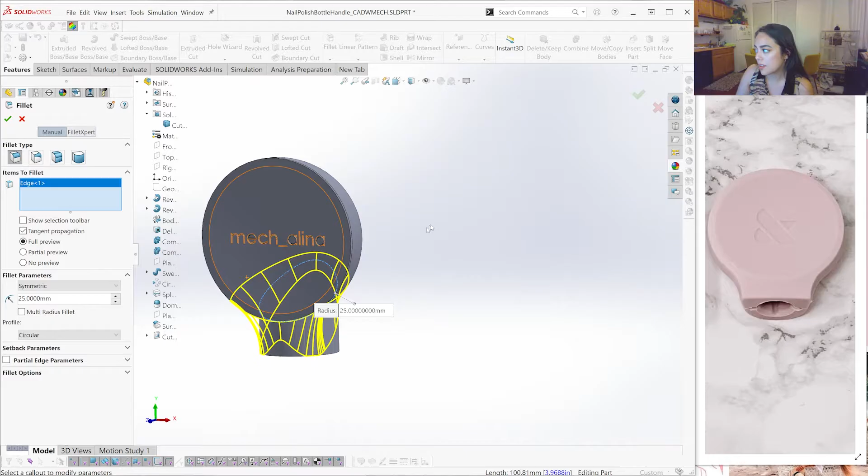I saw this nail polish bottle capper that you put on a bottle of nail polish that makes it easier to handle and more easy to paint. Online, the reference product looks like it's some sort of elastomer. I have a 3D printable TPU filament that I think will have that type of compliance needed to fit over different nail polish bottle caps, and I think it will work just fine.

So let's dive into SolidWorks.

The photo I have here is showing the nail polish cap we're making. It kind of looks like an igloo. So how I'm breaking this shape down: it's my first time designing it. There's this igloo dome shape, and then there's this revolve nail polish shape, and it all sort of lives and has this flat portion here, and they blend together. So I'm gonna do mostly solid modeling and some combines to create this shape. I'll keep this reference image up.

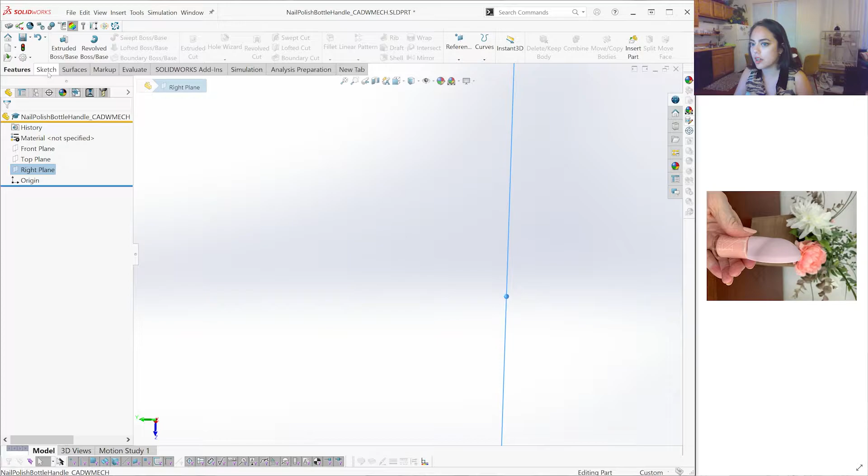Let's go. I already created the part file here, and let's just start creating a geometry sketch. I'm gonna actually sketch out everything here to not create a solid feature, and then go back and convert those entities into different features. So this is kind of like my base model that will contain everything.

Y'all know I like my infinite length center line. So I'll do that there, and I will sketch out the actual nail polish bottle, something like this on the inside. Actually, I'll do one with a slight taper to make sure we know it fits my personal collection of nail polish bottles.

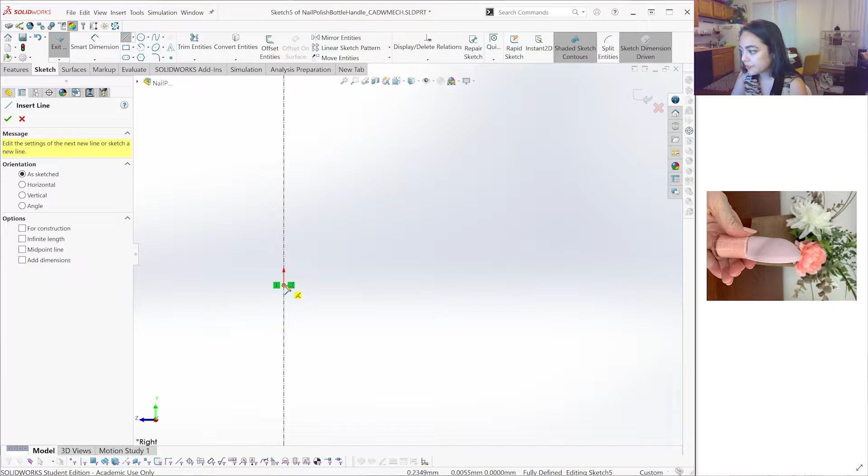All right, I didn't click the origin of that one. If you're following my keyboard shortcut settings, which I will upload soon, that was L to create lines. And let's taper on the inside. If you know you're eventually going tapered, make sure you're not getting auto constraints like verticals where you don't want them, and that you're starting your design with that taper in mind.

So the first section I see, and I'm gonna enclose this here, is right now I'm doing this portion of the igloo. So I'm only drawing half of it. I will be revolving things around this infinite length center line, so that's why it looks how it currently looks.

The nail polish bottle I will make green, and these lines here I will make another color. I always use sketch colors, and this is just a visual guide and reference for me. And I will make this hot pink. Cool, so that's this portion.

And now the next portion is the igloo portion. This igloo portion, if you can imagine, is like another dome revolve shape. So we have one revolve along this length here, and then we're gonna have another revolve around that length there. So first thing I'm gonna do is create that revolve in the other direction.

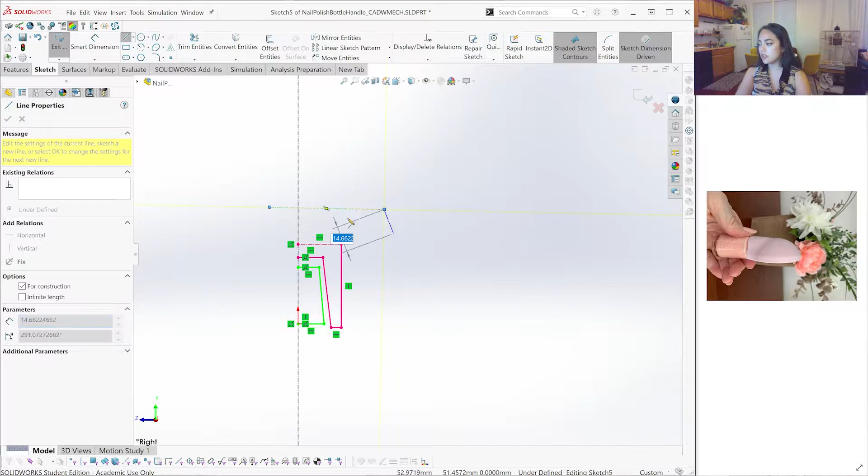This here I know will be horizontal, and I will just start by creating a circle and doing something like that, figuring out where the circle ends. This is kind of funky because the top of the circle actually kind of blends with this surface here. Maybe if I switch directions like this, that would help. Give me one moment. All right, I just switched directions to make this a little easier to visualize.

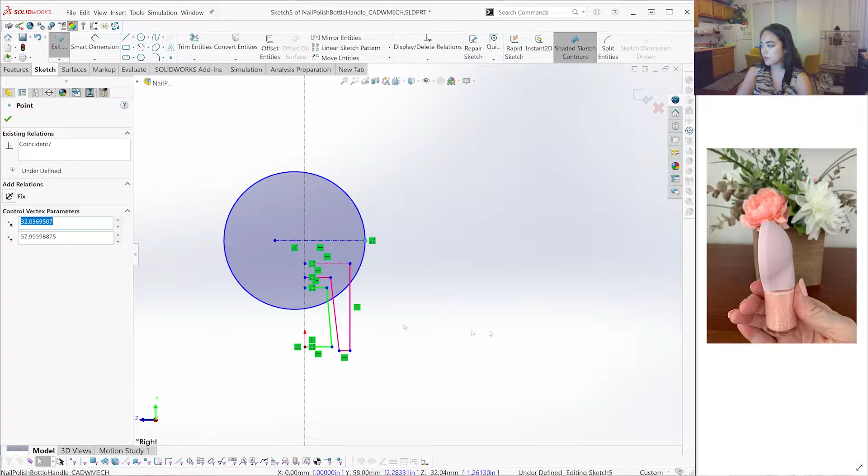Again, I'm not putting dimension numbers since this is kind of a freehand sketch, but it's gonna look something like this, and we want the flat of the dome to end where this revolve stops. What I mean is, since I'm only drawing one side, I actually want to know where it falls on the other side. So I'm going to simply mirror those entities, and it's totally fine, this is all kind of just reference geometry.

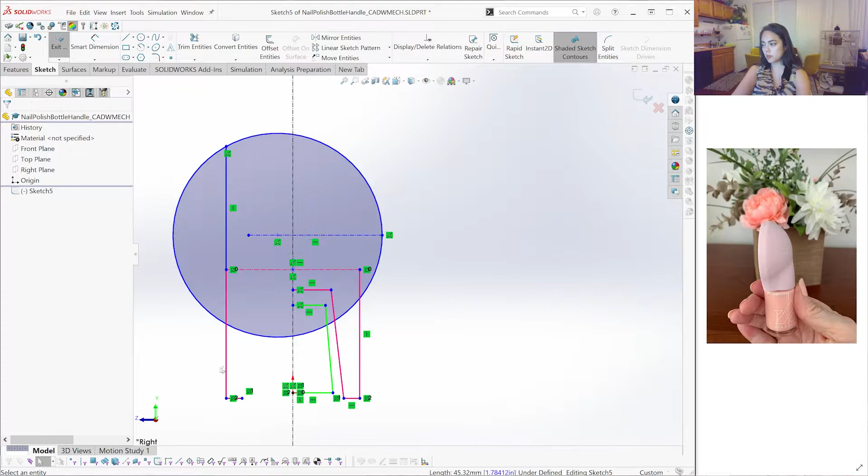Cool. So with this line, I know that is where I want to cut my circle. I'm going to do something like this. Actually I wanted this to be a regular line. If you highlight the line and click G with my keyboard shortcuts, that will turn it back to regular. Trim entities, love my trim to closest, and we start having it here. Let's just delete these other excess segments there.

So now we have kind of the start of the overall shape here. And then for the igloo shape, I am going to make that purple. Cool.

Tangent isn't really what I want here. What I want is for this to be tangent to a perpendicular line. So I'll create a little reference line up here and make that horizontal to this, or we can make it perpendicular to each other to make it a little more flexible.

So holding both of those perpendicular relations, let's take this line and this line and make that tangent. Awesome, so that gives me kind of that shape I'm looking for.

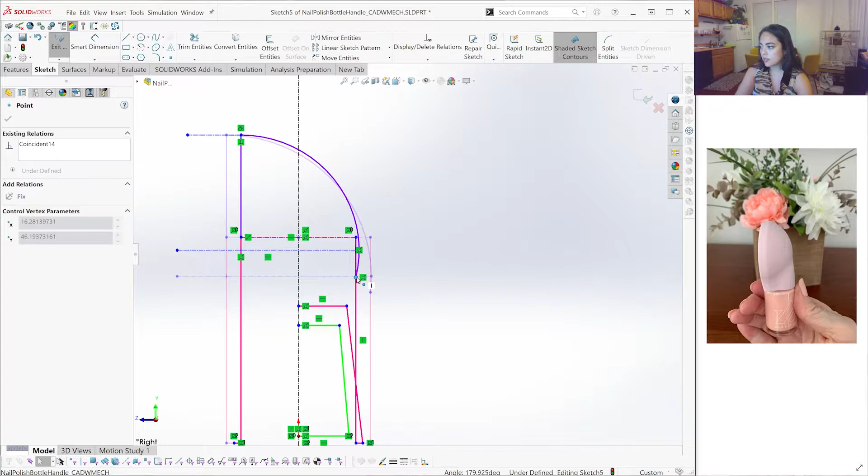As I deleted that vertical there, let's make this line collinear for now. And this we can begin to mess with later, but let's just make sure that it will generally build.

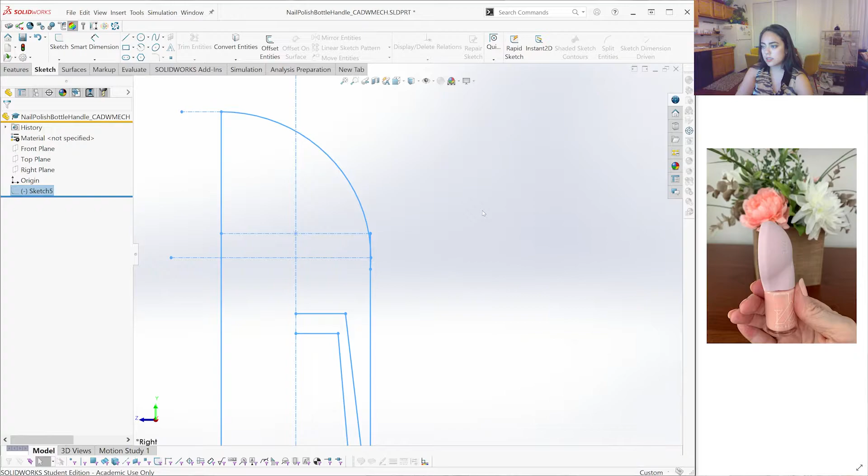Do something like that. And I don't actually necessarily think the midpoint of the circle is there. Great, let's get started and just start doing our solids and see what this begins to look like. Again, I'm not creating my features from this.

This is just our overall geometry sketch for visualization. On the same plane, we can start now building out the features. So the first thing I want to do is revolve that bottom feature.

So I'm going to go here, here, here, here, here, and I'm converting all these lines. Amazing, sometimes those long lines don't show up unless you zoom way out. I just converted that into a geometry sketch.

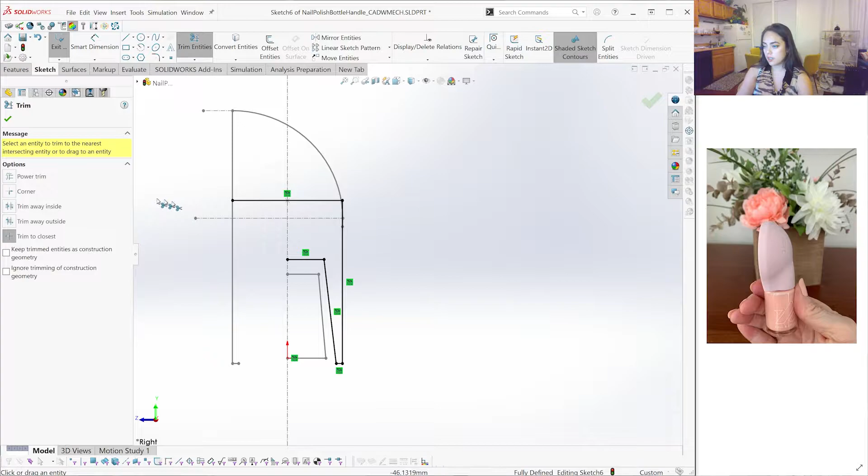And then let's trim some entities. Cool, and the last thing is just to connect these two pieces. And then, yeah, that's the sketch for the tube that the bottle tip inserts to.

Let's revolve. And yep, I picked the right line. Awesome, that's the bottom piece done. And then now let's do the revolve in the other direction for the dome of the igloo.

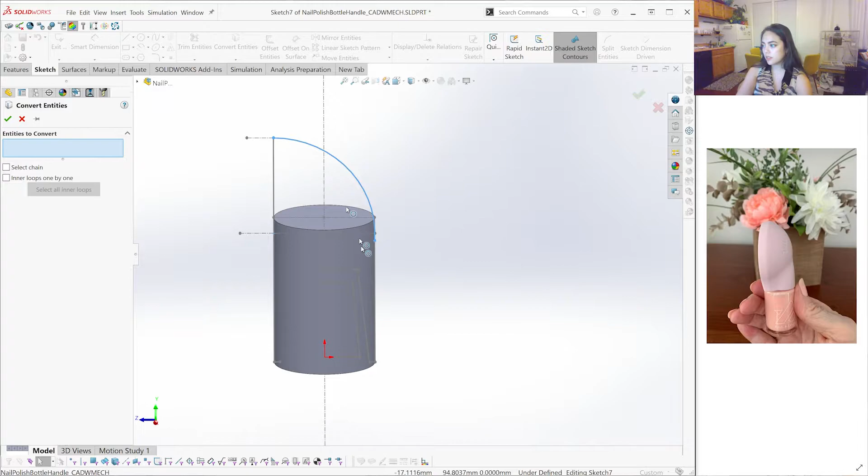So just start another sketch, right plane, and then let's convert the entities we care about. Convert. So center line, this line, gotta make sure it all connects.

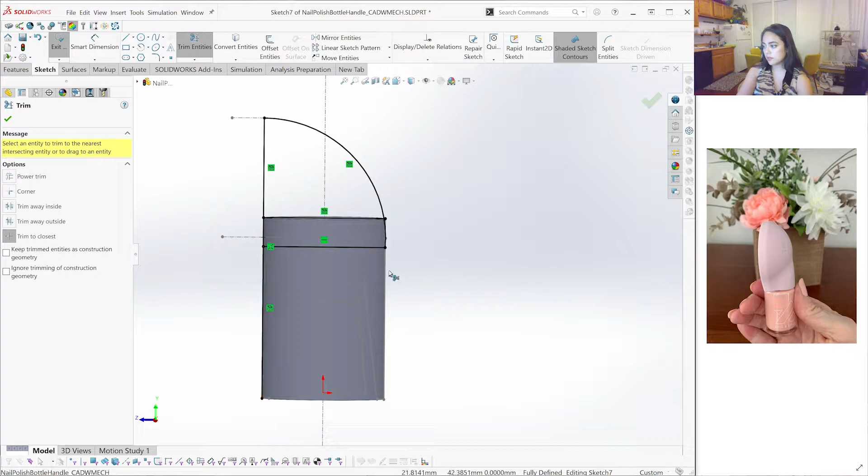And then now I'm just connecting the dots here because I didn't originally draw that line there. Let's trim the excess down here. It's fully enclosed.

And now we can select this axis of revolution, and we want it to go all the way. So when SolidWorks auto selects thin features, that actually means this isn't a properly enclosed sketch. I could have selected it to work around it, but I can see actually this is the line I did not want, I think that was for the other feature. So I'm just gonna delete that.

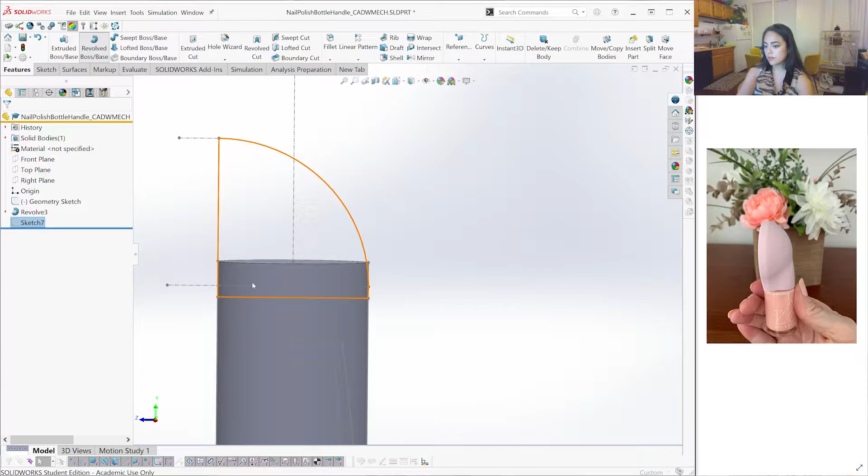And then let's check shaded sketch contours. That still looks good. And let's revolve. Something like that, and we don't need to merge just yet.

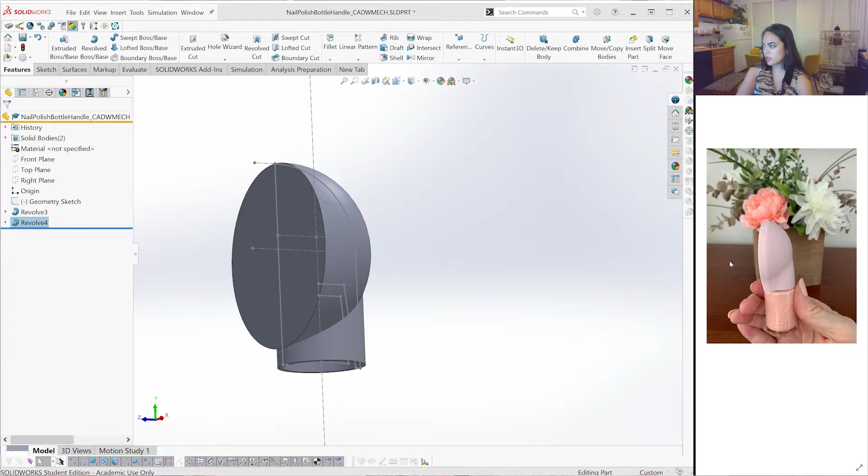Awesome, so we now have our baseline shape. This kind of looks like that one character from WALL-E or something, you know what I'm saying?

Alright, so I think this actually is starting to look pretty good, kind of the things I want. I'm not going to exactly mimic this kind of flat bevel chamfer edge along the corners or all of that, just kind of want the overall basic shape.

But let's go in and start throwing some dimensions now that we're feeling good about this kind of freehand design. So going into the geometry sketch, clicking N to view normal to the plane. Let's start measuring some stuff.

So there will be some compliance, and I think my TPE filament will stretch a tiny bit, maybe up to 1/8 of an inch. So if it's too big, this won't work, and if it's too tight, well, we want it a little tight so it can fit around the different nail polish bottles.

But you can't go too big. So I'm gonna take my biggest nail polish cap and make sure that you still get a little bit of a fit here on this one, and so this one's just gonna be my baseline dimensions.

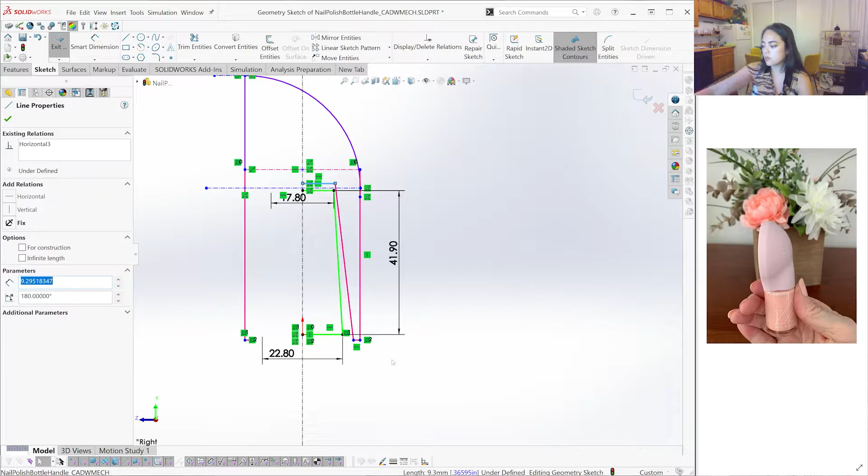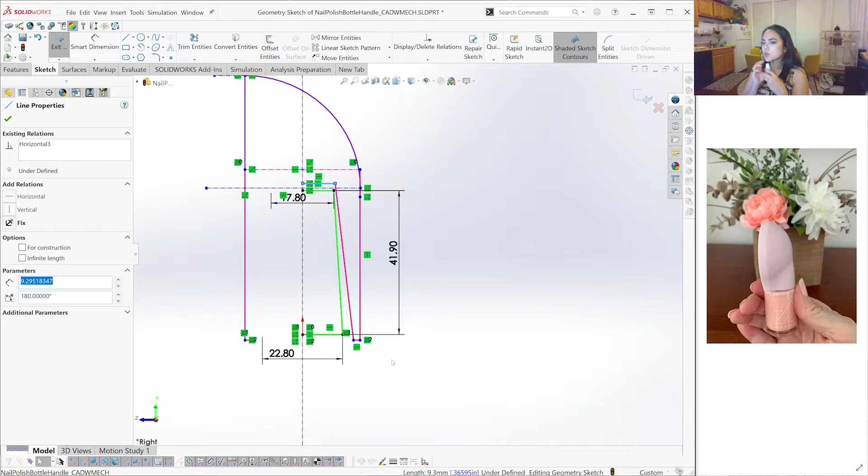Let's start editing the dimensions that go around it. One decision is where do we want to bottom out. Do we want this to bottom out on this part of the nail polish bottle, or do we want it to bottom out from the top part, ramming up into it? Thinking about it, it probably doesn't matter. The big thing is we don't want the cap to get in the way if we want to screw this back down, but we probably want to remove the cap anyway.

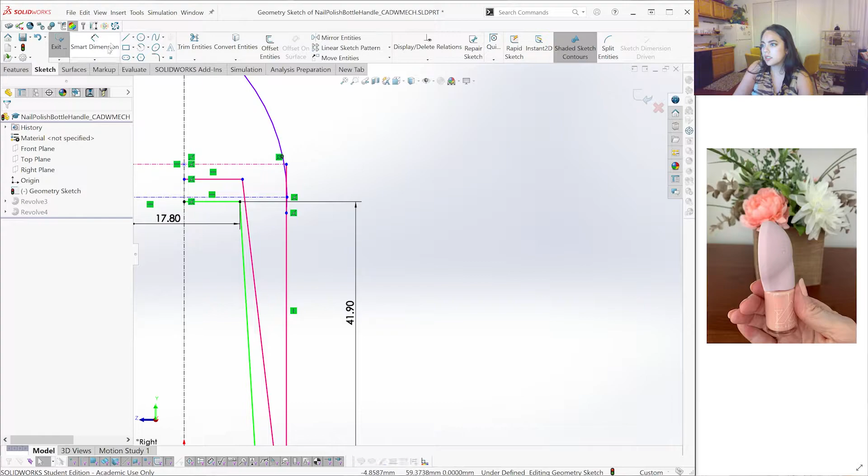So I'm going to, at least with this nail polish cap, have this and this flush or aligned, so I'll make that go linear. And let's give this a little bit of a gap in case there's a significantly longer nail polish bottle, so I'll add 5 millimeters there.

Nice. And then as far as this wanting or needing to fit, the other thing we need to consider is I also want to make sure I'm getting a tight squeeze on this bottle. So right now with the draft angle, this needs to go pretty far up to be able to match the diameter of this one.

And I think we can compensate for that by adding another feature in later. I want to add a crush rib feature, and I'll show you what that is if you're not familiar. I think we can do a pretty much 1-to-1 fit on this little guy here.

So what I'll actually do is make this line parallel to this line. I'm doing this because I know my material is compliant and stretchy, and my 3D printing is a little off, so I'm just going to make this like a 0.05 of a millimeter gap here, just a hair's or so bigger.

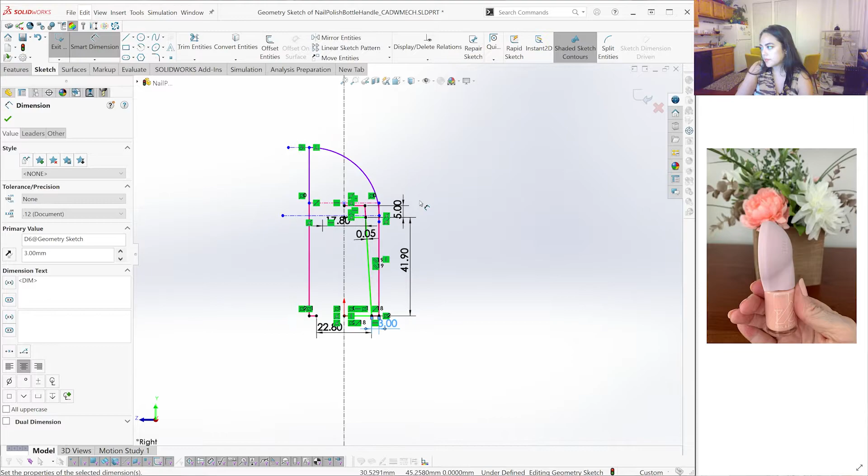And that's looking good. I'm just going to exit my sketch here to be able to save and see the updates.

Let's go back in. Beer break. I just winked at the camera. I didn't like that, I'm not going to do that again.

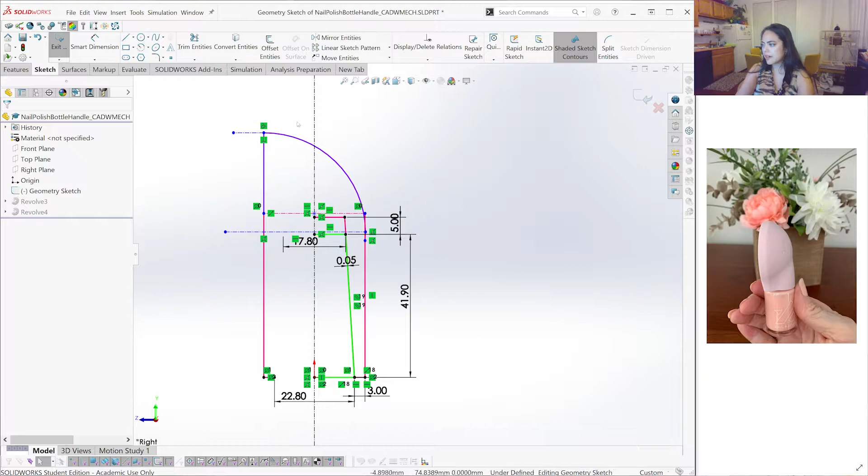Alright, let's play with this bad boy. I don't have real life dimensions, so we're just going to do what looks stylish and hand holdable, what can fit nicely into the palm of my hand. Let's see if I can get back to that side view.

Alright, I have the side view showing again. Some points I care about are maybe how much the crest of the dome sticks out from this portion here, and let's just say a tiny bit, I'm going to make that 2 millimeters, so bring that in a little closer. And then generally, remember, we want to dimension what we really care about, and what I really care about is actually the overall height of the thing, so I'm going to pick that point to that point.

And then just with my calipers and my hand, I'm going to see what would be comfortable for me to hold. Another thing I like to do is always have Play-Doh or some sort of sculpting dough around, which really helps figure out sizing and shapes when doing handheld things or surfacing, so what size and shape is actually going to help me get that nice grip control and paint my nails. So something about this big, at least for the spherical portion, and then a little more sticking out.

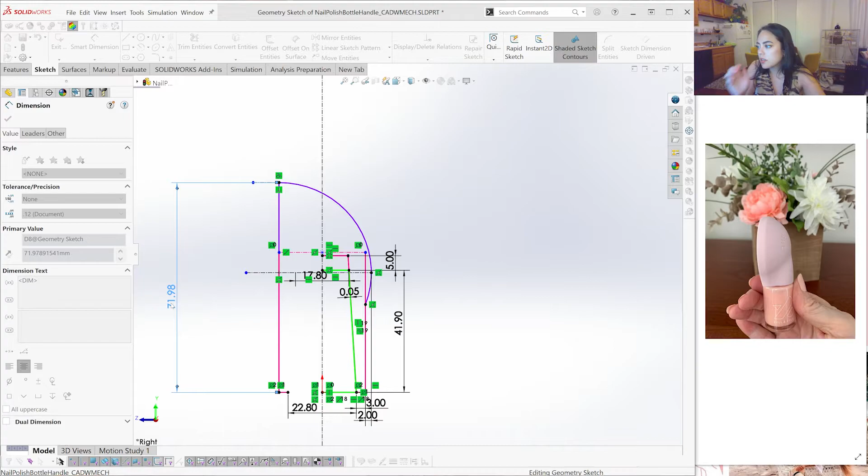So this has a spherical portion of about 60 millimeters in diameter. We want it to stick out a little bit for the bottom portion. If you imagine this sphere were to continue down and around, like it would go down to this point, we have it sticking out a little. Maybe 15 millimeters. So let's make the total of this 75.

I'm going to turn off sketch colors to see what we have not constrained. Actually, it looks like everything is pretty constrained except this reference geometry line, which doesn't really matter. I'm just going to tuck it away with this one here. And yeah, we have a fully defined sketch, which doesn't matter really for the geometry sketch, but make sure it stays stable and doesn't update funky.

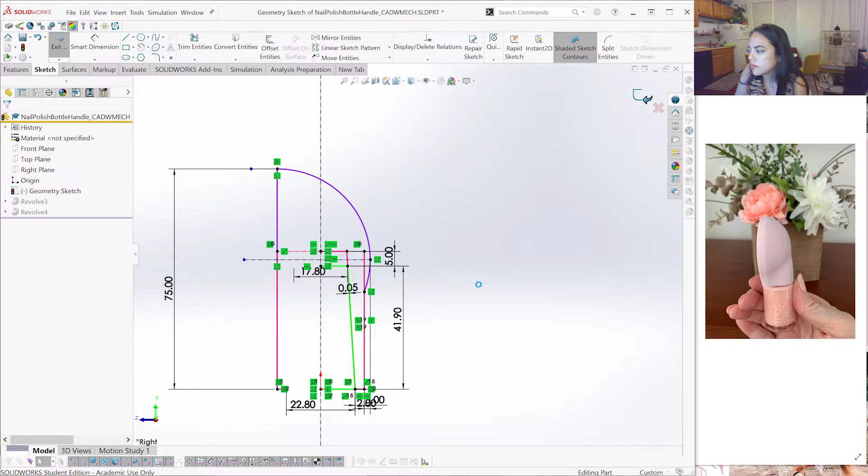And let's solve some problems. So we got some rebuild problems, which is no problem at all. Aha, so actually what I did before with that reference was breaking it.

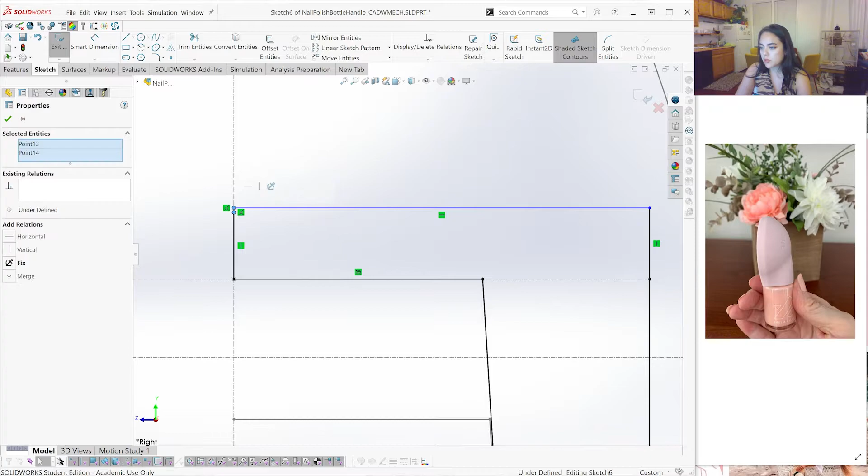So what I'm going to do, just to keep this an enclosed profile, clicking L to start my line, I will just add some arbitrary thickness there. I totally forgot that that reference line was to enclose the first profile, because I was picturing this to do this in 2 features. This distance doesn't really matter. I'm just going to say 1 because it's all in here and we're eventually going to merge it together.

Alright, and this is off too. So this is actually our center line. I just converted that over, trimming the excess.

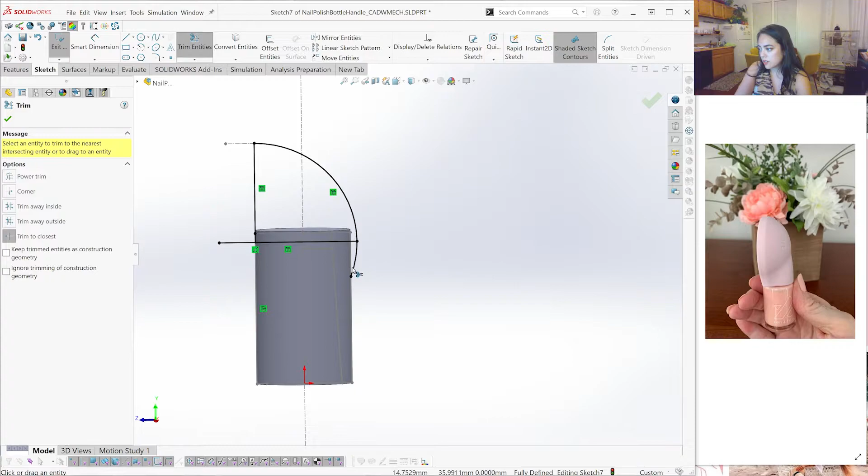And when we exit, let's see if that picks the right revolve. It errors out, no problem. The axis is not valid. It's valid now.

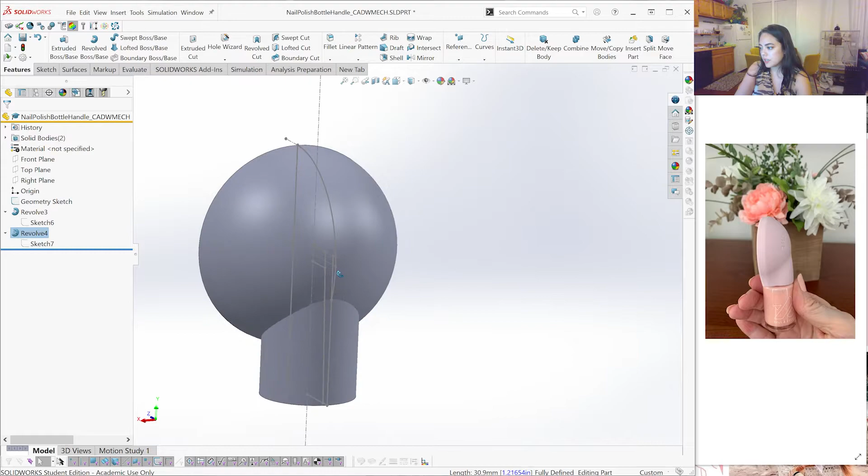Great, and now we have our basic shape, and we'll do my favorite thing, which is throwing lots and lots of fillets to smooth out some surfaces. So let's actually...

Start by combining these features, and then let's add the detail features to help with the compliance of this bottom portion to be able to stretch with slightly bigger bottles and then work with slightly smaller bottles as well. Alright, so what we want to do is make sure we don't have this overlap section in.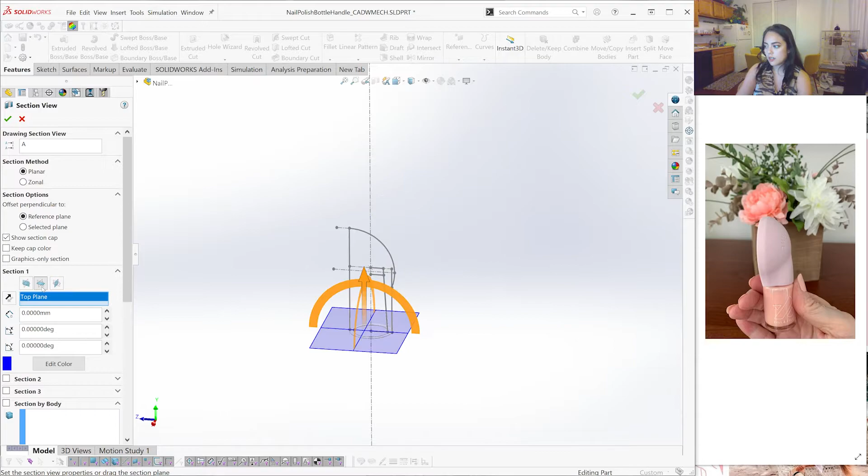If I were to do a section view, so that's clicking here and switching over to the right plane, you can see we have a major issue of this material being stuck in there. There's a lot of ways to do this.

I'm going to do some subtract body features. So the first thing I'm going to do is create a subtract body that I want to subtract from, but I want to keep this original Revolve 3 because I like that. So the first thing I'm going to do is just copy the body of Revolve 3.

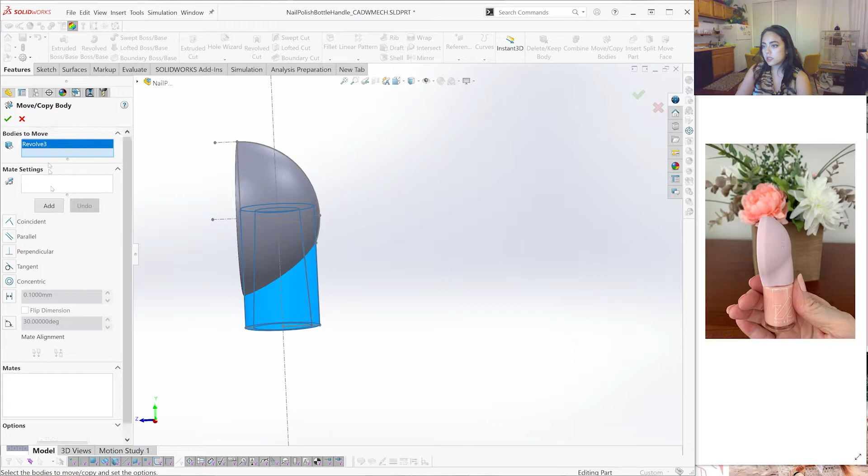So this is move/copy, body to move is Revolve, and I don't want to move it, I don't want to do anything, so I just want to say copy. If I move to this menu, I like copy, click OK. I now have a copy of this.

So I'm going to hide these 2 original features, and then let's turn this feature here into a solid feature. I could fill this feature, I could do a lot of that stuff.

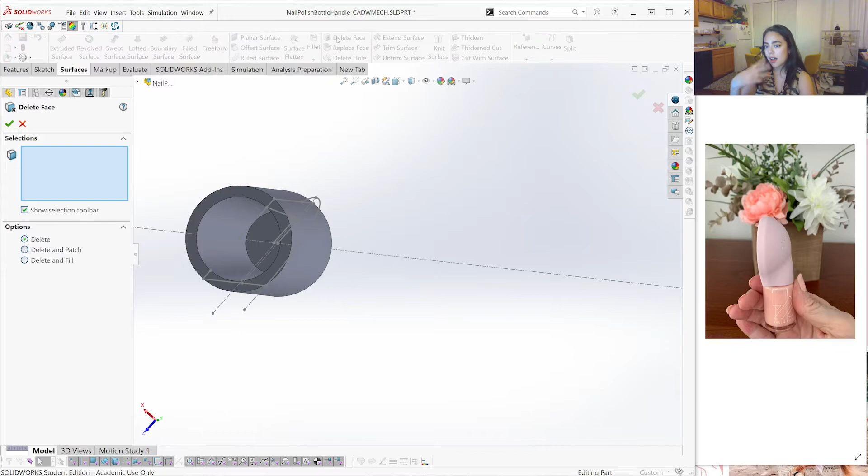This is not always work approved, but I will do a feature called delete face, which is a surface feature. We'll delete face and then have SolidWorks auto repair it with a patch. So if I were to delete this face and this face and show the preview, you'll see where it patches.

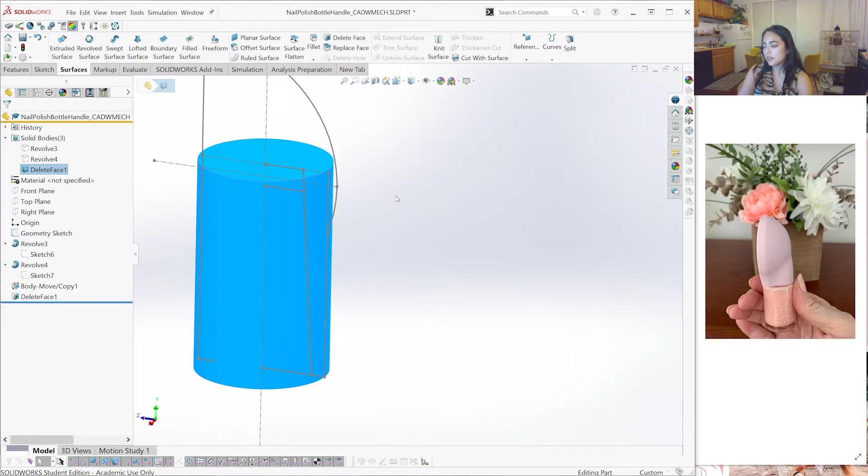And now we just created a full solid body of that. Delete face can kind of make your models a little sketchy sometimes, so it's not always advised to do that, but it's quick for this at-home tutorial.

I'm going to go now to the combine, subtract body. So you have, this is the main body. I want to subtract this one I just made.

And right now it looks like we have an error of 0 thickness geometry, which is probably the corner right here. So let's see what's going on.

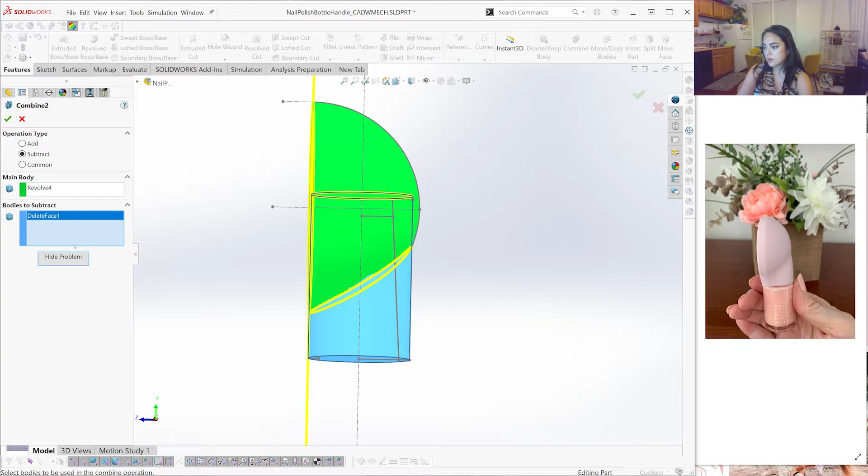So that's something we can actually fix within the geometry sketch. It actually doesn't like that it's completely aligned, because then it's aligning those surfaces at this intersection down here. Kind of strange.

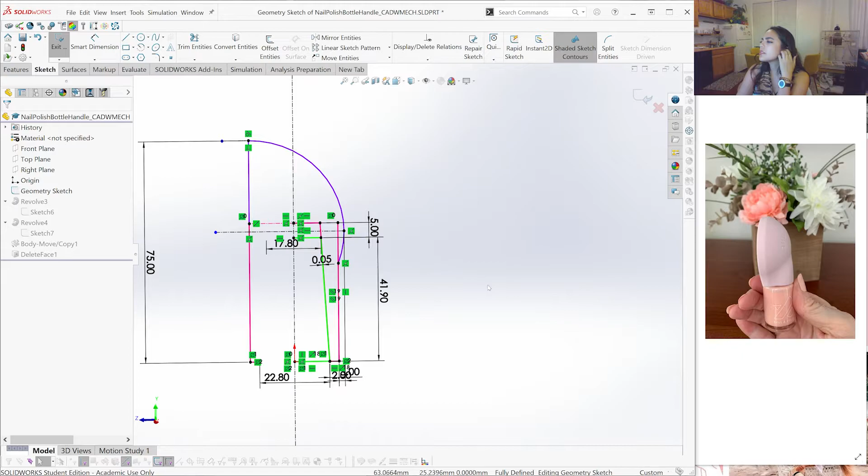So to be able to fix that so it isn't as weird, I'm actually going to go ahead and extend the sphere a tiny bit, so there's a little bit of overhang, like that.

If you're making a part exactly, this is maybe not a way I would recommend, but this for me right now is just a bit of a quick workaround, and I just want this to maybe overhang. Oops, I accidentally doubled that dimension.

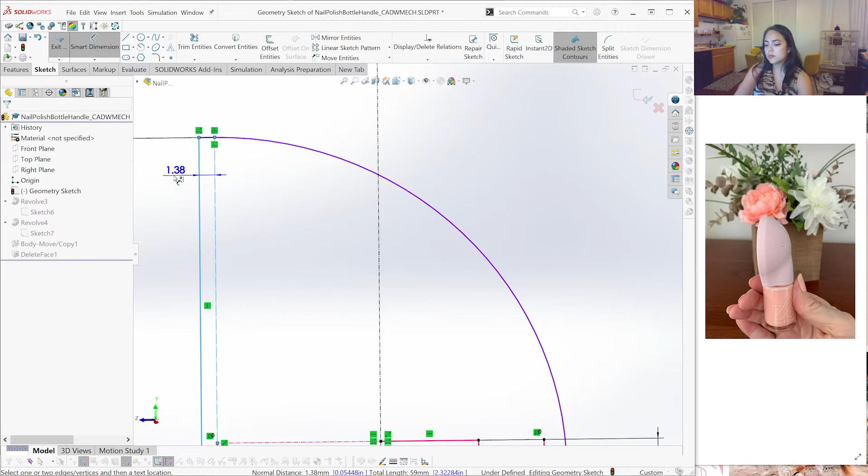Let's make it significant. Let's make that overhang by like 1 millimeter. I'm gonna have to go back and update the second revolve here. It's not gonna like that. I've got to reconvert some lines over. That's totally okay, so convert, convert, convert. This line here I'll leave, but let's make that construction. Let's make this construction.

Can you hear Faraday in the background? I got a new mic here, and I hope you can't hear him as much as in my previous videos.

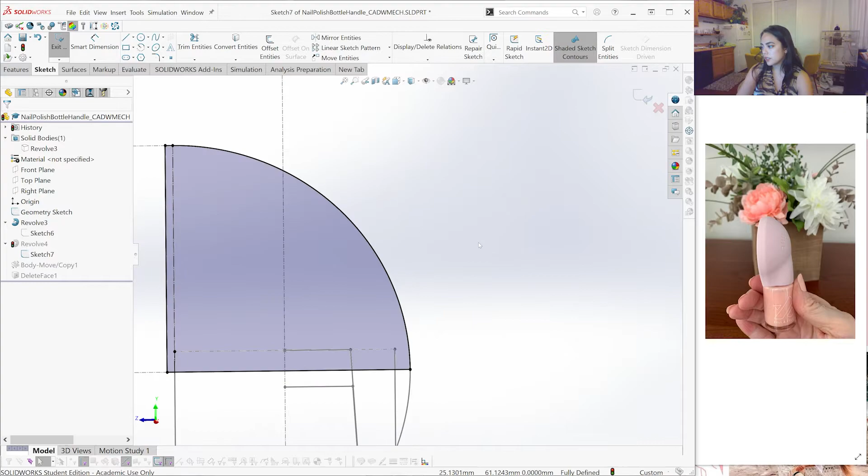So there is an issue. The sketch is not fully connected, and there we go. The lines were connected. Sometimes a little wiggle fixes that.

Alright, we have our WALL-E girlfriend, partner, BFF looking thing.

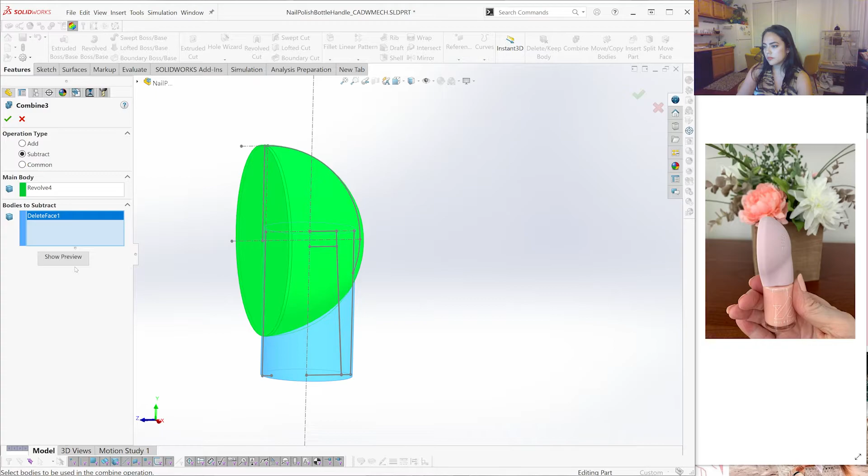And let's see if that fixes this problem. And voila, we now have the top igloo with a hollow thing.

Then I'm going to bring back the revolve here, and I have my original piece here. See, when we did that subtract body, it deleted that body and it got absorbed into that feature. That's why we had to create that duplicate. And now I want to just combine these, so this is one solid part. And voila, it is one solid part.

And we are getting there. I want to save this, and let me hide sketch lines for the crew here.

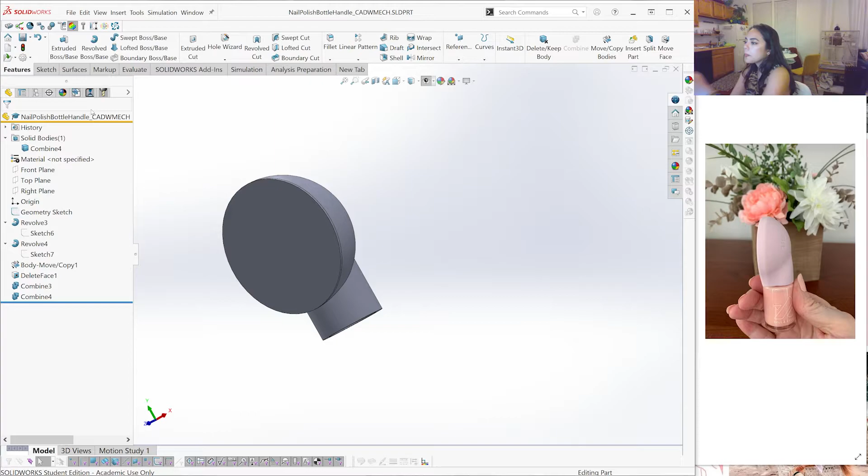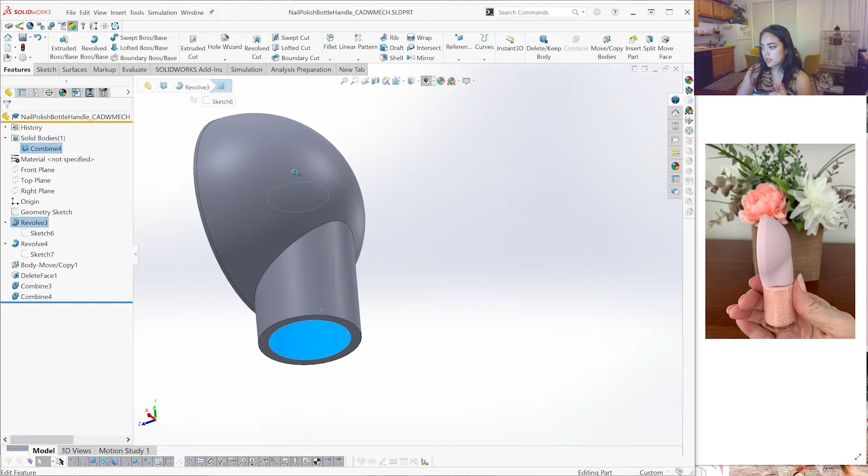Alright, let's do the crush rib features on this here. So how should we do the crush rib features? If we did a straight extrude, we can't, because the inside here is tapered. So many ways to go about this. I think what's going to work best is if we did a sweep along the path, and then created a circular pattern and could pick how many crush rib-like things we want in this.

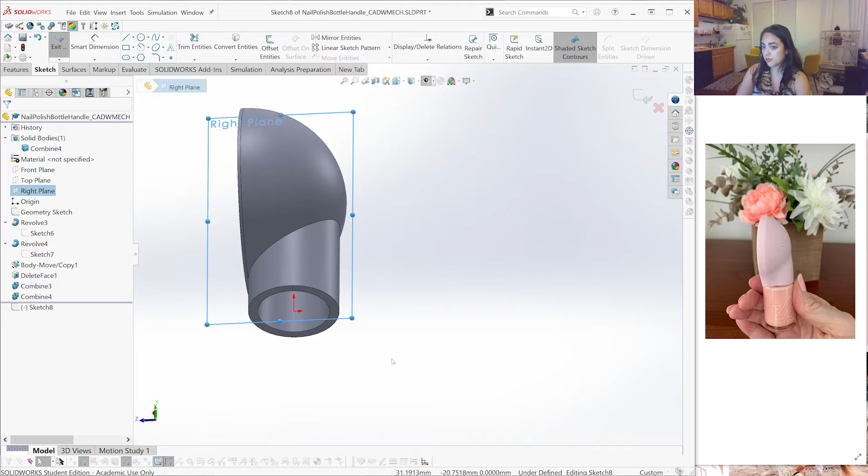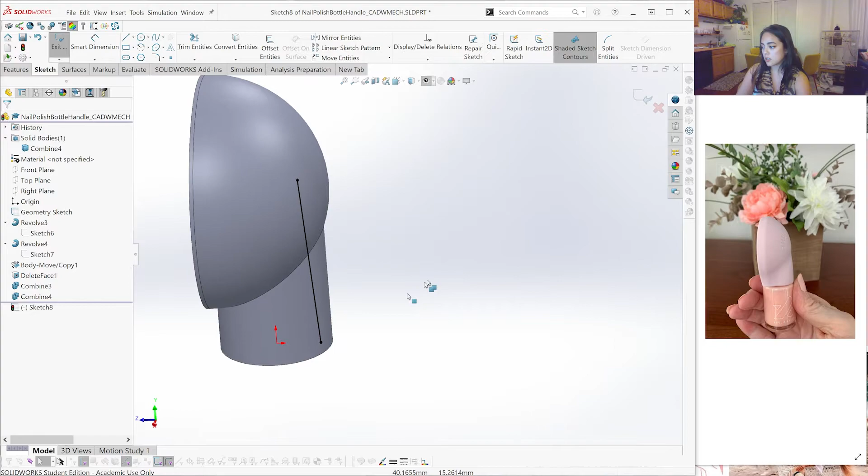So let's definitely start that. The first thing I want to do is create the sweep path, so I'm going to cut through again the right plane. It's my favorite plane, and I just want to follow the path of the inside. So if I just click that inside surface and then did that intersection, it will give me 2 lines. I only need 1 line, so I'm going to delete this one here, and really, boom, that is the path of my swept path. So remember, a sweep is a path you want to sweep along, and the profile.

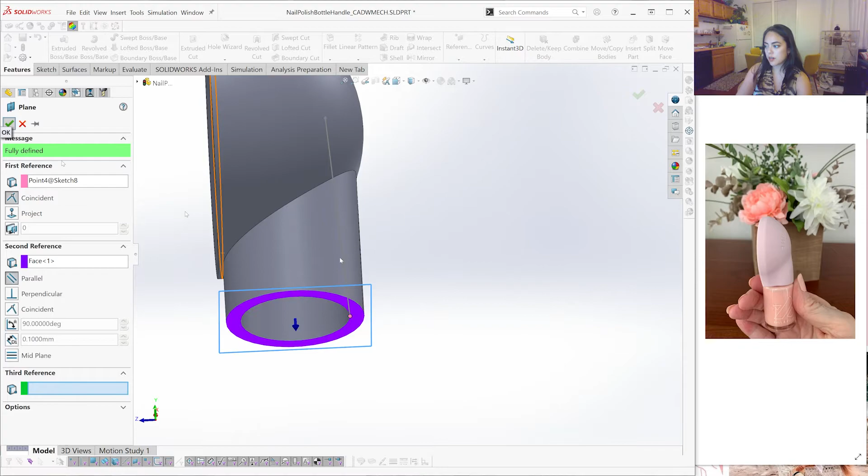So to create the profile line of this, I want to create a new plane, or I could sketch on this face. But to really make sure I'm clicking the right spots, I want to actually use this sketch to derive my plane. So I'm going to click this point parallel to this face to create that. It's the same thing as that face, but I just want to make sure that point is derived in case something gets wonky.

So from that sketch, or plane, we start to sketch, and we can pick what we want our crush rib to look like. I want the crush rib to be like a half circle, so if I drew a full circle here and have the midpoint resting and connected - you always want, when you're doing a sweep, to have a point of your sketch relating directly to the sketch path, and so that is my coincident there. And then for a little crush rib, we probably want the rib to stick in like 2 millimeters, so that's a radius of 2, or since we're dimensioning diameter here, that would be a diameter of about 4 millimeters.

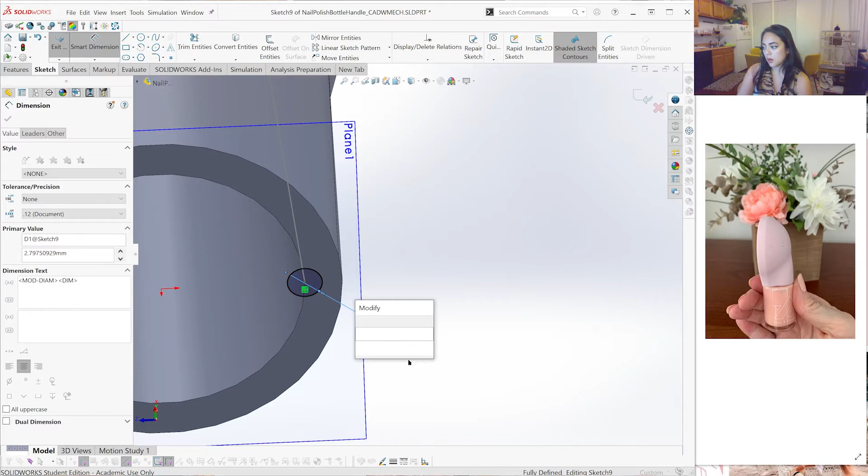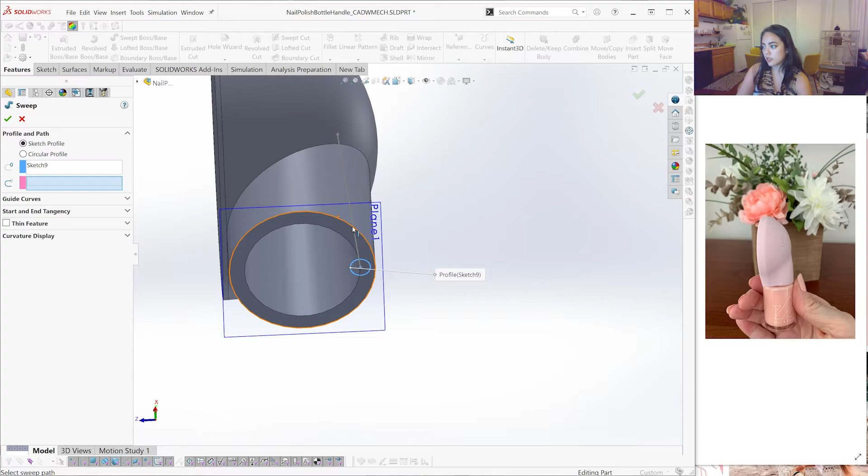Cool. I don't need to do anything else with this because I will be merging the solids, so I'm totally okay with that overhanging there. I'm gonna go to features, we'll go to our swept feature. There is our sketch profile, here is our path, and then I don't need to mess with any of the other features, and boom, there is my crush rib. You know, I will be printing this out of TPE, that's kind of semi-hollow, it has an infill pattern, so I don't want to make this necessarily hollow itself. So I'm totally fine with that feature.

Now with this feature, let's circular pattern it. And how many do we want? 4, 6, 5 if you're edgy.

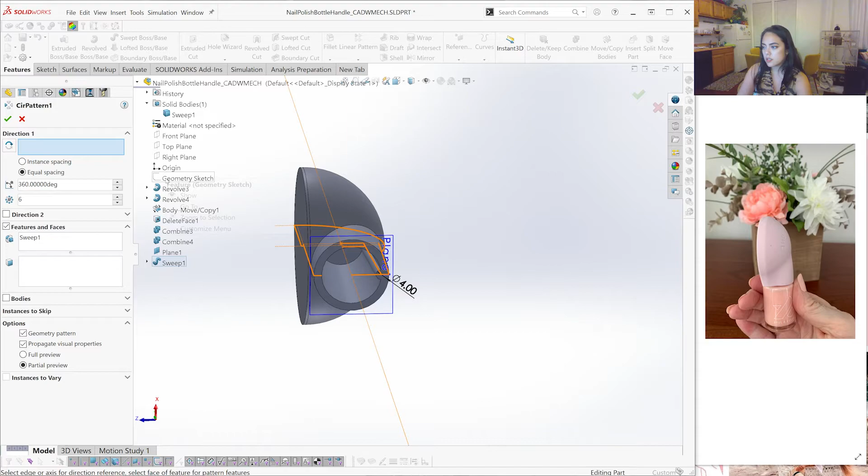So the first thing, let's go in order of this circular pattern wizard. The direction is that initial axis, so I'm going to just select that from our first sketch. 360 degrees all the way around, and then 6 here.

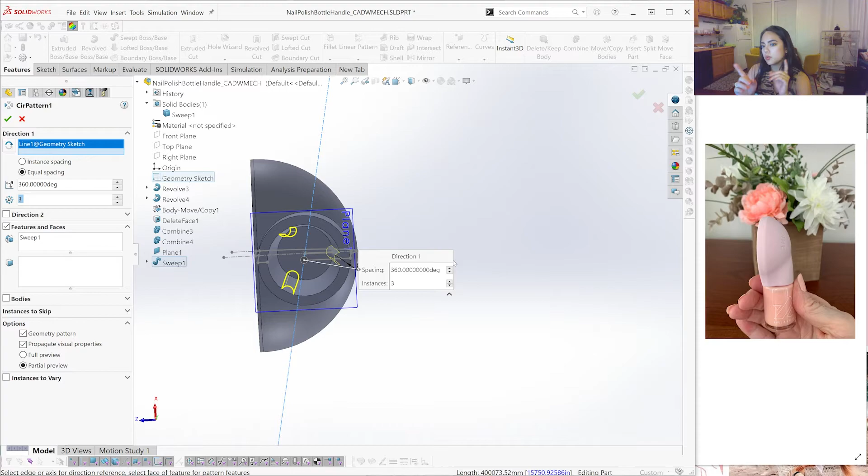Actually, I don't think we need 6. I'm going to use an odd number. I feel like 3 is going to be good, because when you're doing circular things, they'll be more balanced out with 3, like a 3-legged stool versus a 4-legged stool, if you know what I mean. So we can just do that and say 3.

Alright, and then let's just start making this look beautiful, and let's throw some fillets on it. I'm just gonna eyeball it and whatnot.

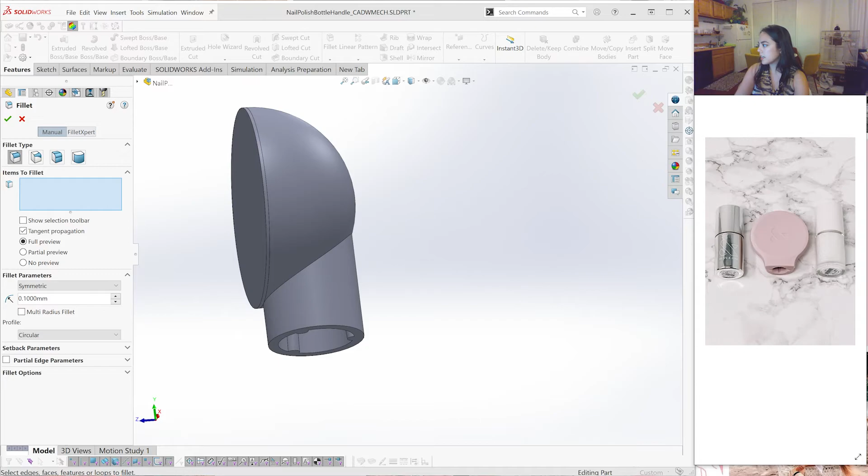So something else I noticed in this design is these little cool stretchy relief things to make it really open up and stretchable, or compliant. It's like a stress relief to allow it to open up at those points. I don't think we really need that, but you know what?

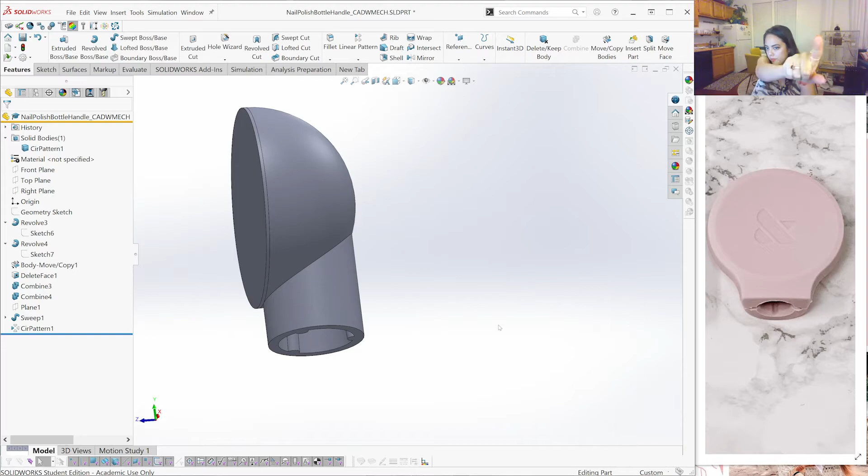I kind of like this dome feature actually. Hold the fillets - remember, we always try to do our fillets and chamfer features last. Let's do this cute dome feature, and hell, let's just throw a logo or something cute on it too.

So there is actually a dome feature within SolidWorks. I could have made this dome-like feature with the dome feature in SolidWorks, but I just wanted to show you how we can get a little more fancy with Revolve.

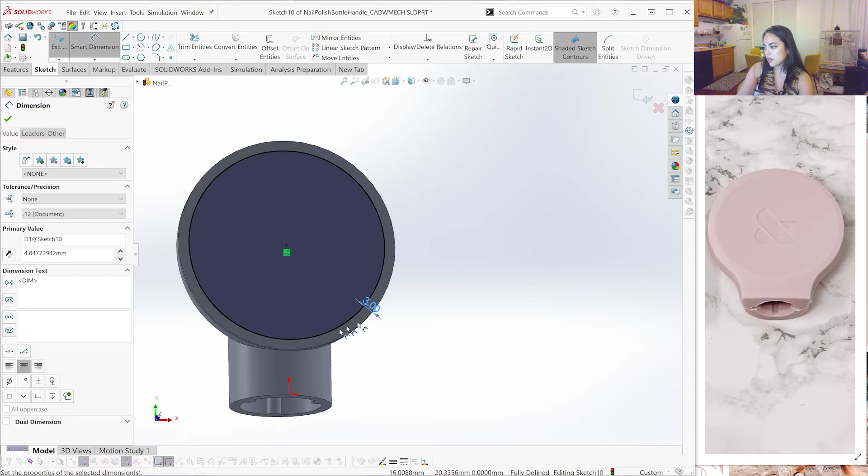So I wanted to find the outside of this dome here, so basically I'm going to draw where I want that dome to start and end. So I just drew a circle, and I want a little bit of that edge to kind of match the thickness of our other material. So we'll do 3 millimeters, and I think that is good here.

So for the dome feature to work, you actually have to select a face to apply the dome to. We don't want to apply the dome to the whole face - you only want to apply it to the inside of the face. So what we're going to be doing here is splitting this face into two faces, the outer ring and the inner circle. We can do this with some cool features.

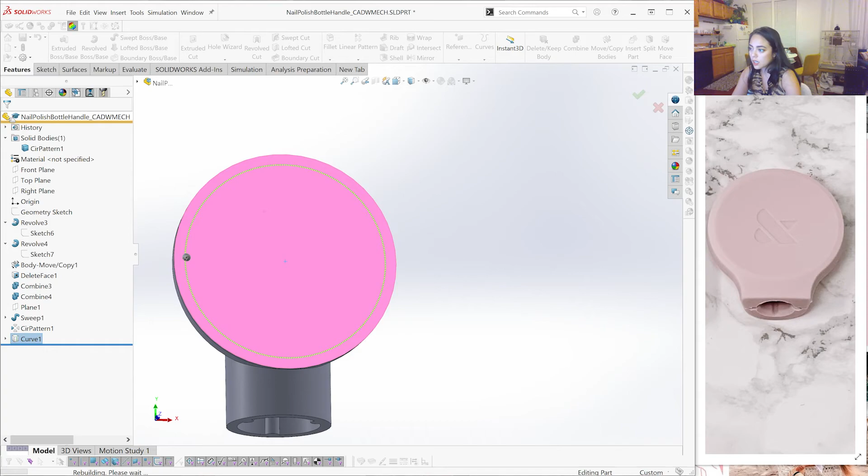Let's see if I haven't used this one in a while, let's see if it's on my feature command bar. Curves, here we go. So we want to take this curve and be able to project it and then split it onto the part. I'm going to select this sketch, this face, click OK, and now you'll see I have a curve there of what I want. And then I want to be able to split that.

Hold on, let's rewind.

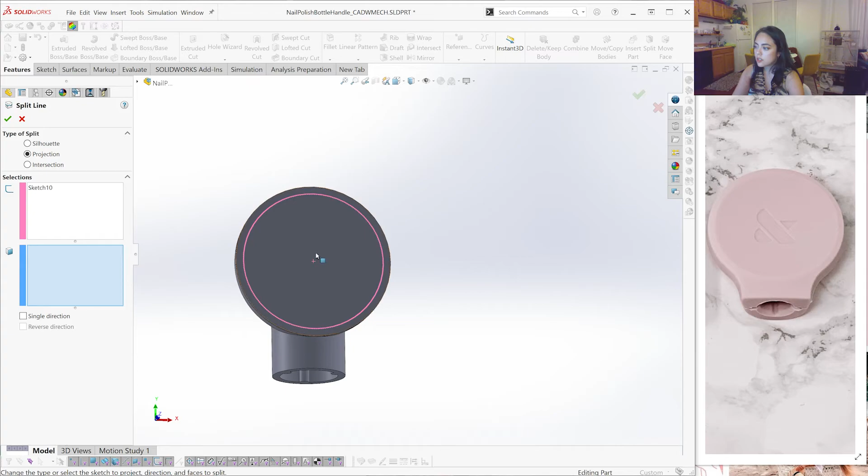Alright, so what we want to do is split that face. So that is curve, split line. Select the sketch, select the face you want to split, and it is a projection - we want this to project down onto that face. And now we have a split here, and now we can apply that cool dome feature I was talking about.

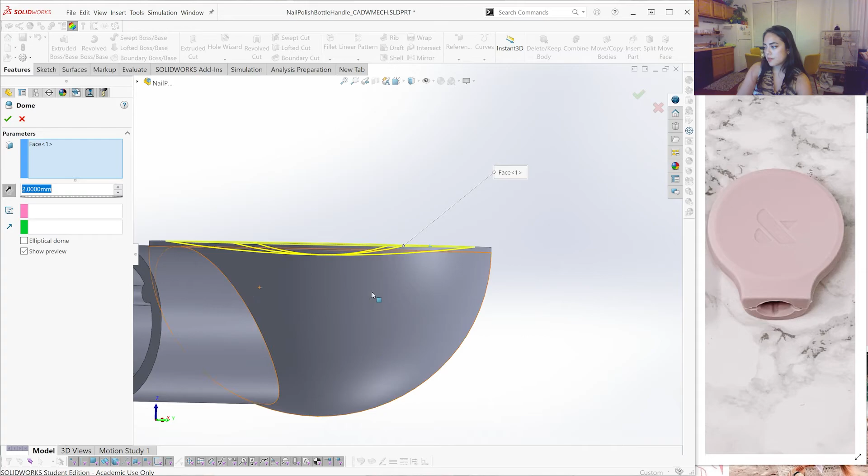If we go to Insert, Features, Dome, you see we selected this face. Let's do a little bit of a side view to see what's happening. Let's say I want my dome to inset in 1 millimeter, and if I reverse it, you can see how that kind of has this nice stylized inset in. Let's see what happens if I increase it more, I'm kind of just eyeballing it. I think that looks good.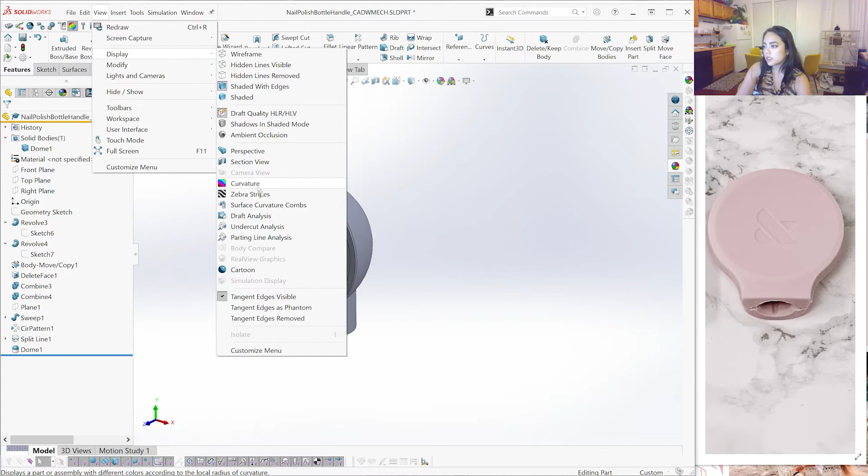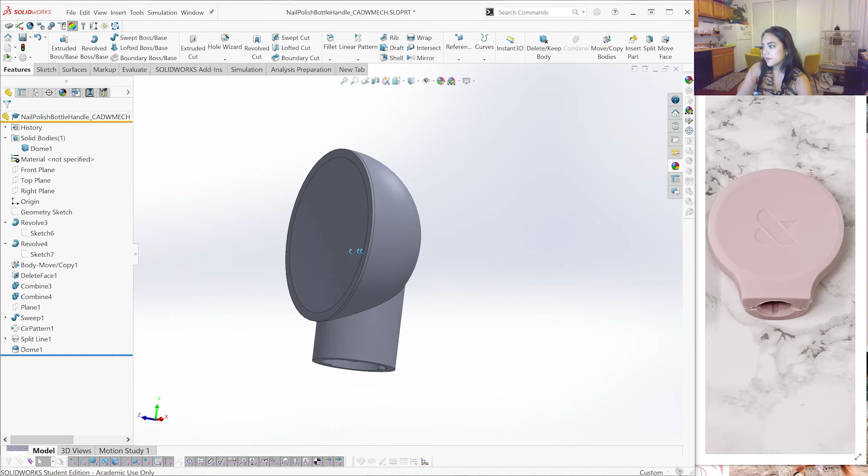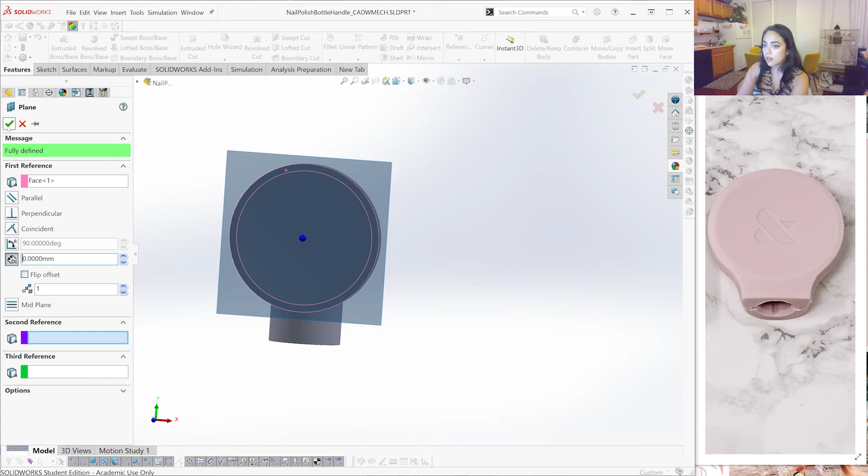The last thing I want to do, second to last actually, is apply that logo now to our dome shape here. Remember, we can't just directly draw on curved surfaces. We always have to draw on a flat, 2D sketch on a plane. So I just created a plane off of that surface.

We'll go to sketch, and we're gonna use the text sketch feature. You have to define a line of where you want your text to fall, and the text can live above or below this line. Then I'll click sketch text, and I'm gonna click that curve to define it.

And this is the mech_alina thing, using the current document fonts. Let's just bump it up. How big do you want it? Let's make it 6.5. And it's cutting off because my curve is not big enough here.

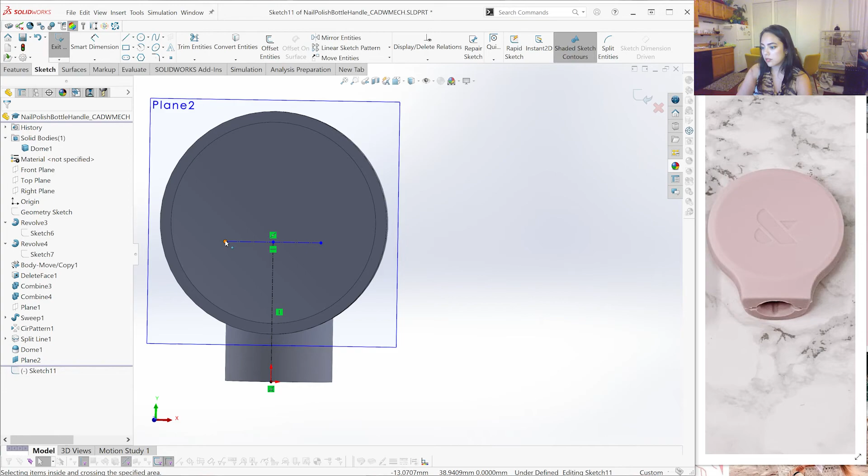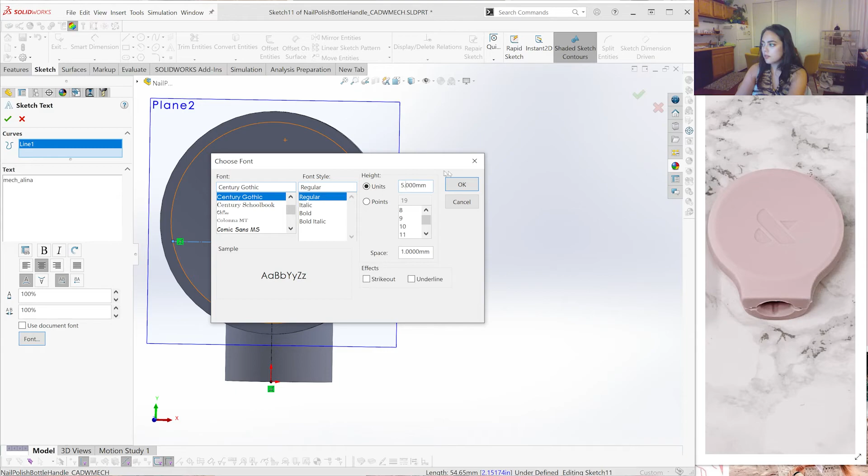Let's try that again, I accidentally exited out just there. Let's make it center. Doesn't have to be as big, maybe like 5 millimeters in height. Cool, I'm gonna click OK to that.

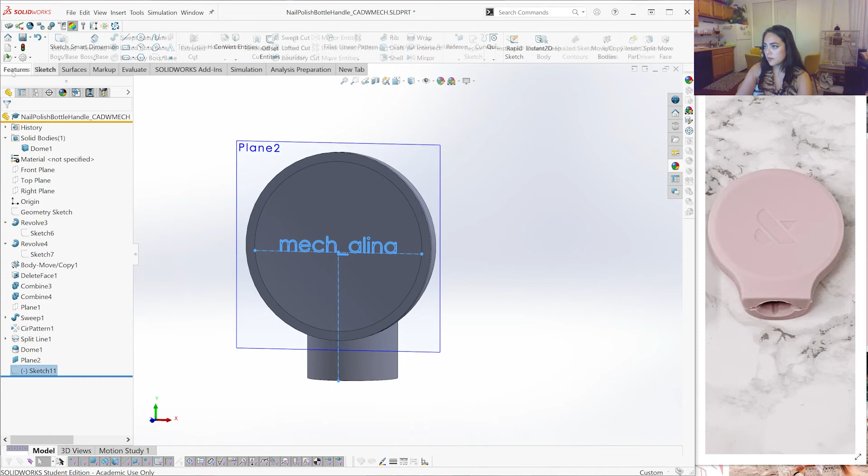I'm just going to move this to where I think the text should live. Something like that. And then I think that text looks good.

With that now as a sketch, we can use it and cut extrude into it to create our little indentation for our logo. So I don't want it to cut straight to a flat, I could say we cut extrude it to a curved surface to match the original surface. You know what, actually, let's just do that.

Let's create the surface that the cut extrude will end at, so we're creating that end condition feature. I'm going to hide this plane, since that's gonna get in the way of me selecting. We'll go to offset surface, and let's say the depth of cut is about 1 millimeter, and we'll offset that surface inwards, not outwards.

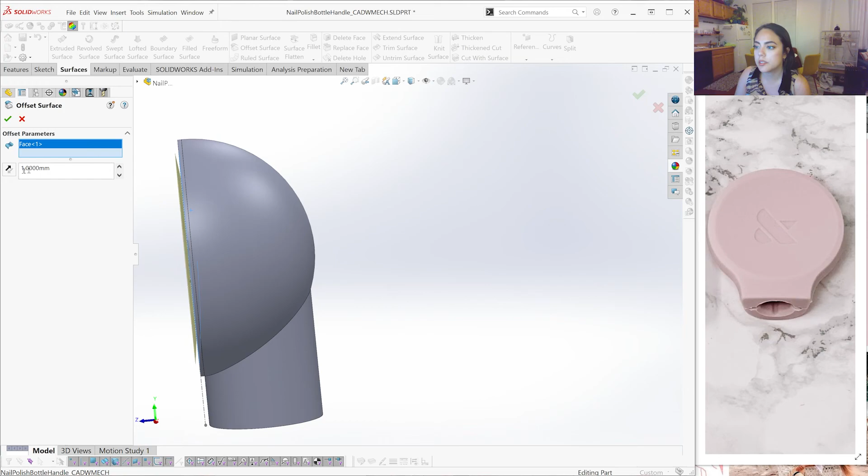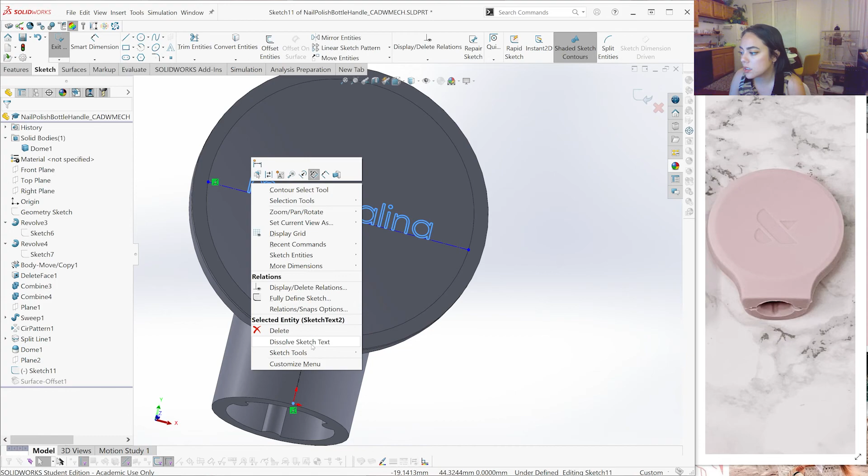For this to go back in here, we need to make sure, right now this is just text, we want to actually convert this into an entity that we can use to cut into. So if I say now dissolve sketch text, let me see.

All right, now we have the offset surface, and we can take our sketch here that we made and do an extruded cut, stopping it at that end condition. So from the sketch plane, we'll go up to surface, and we're gonna say our surface we just made, and let's click OK. Now we have a cut there that is also curved and nicely matching all of that good stuff.

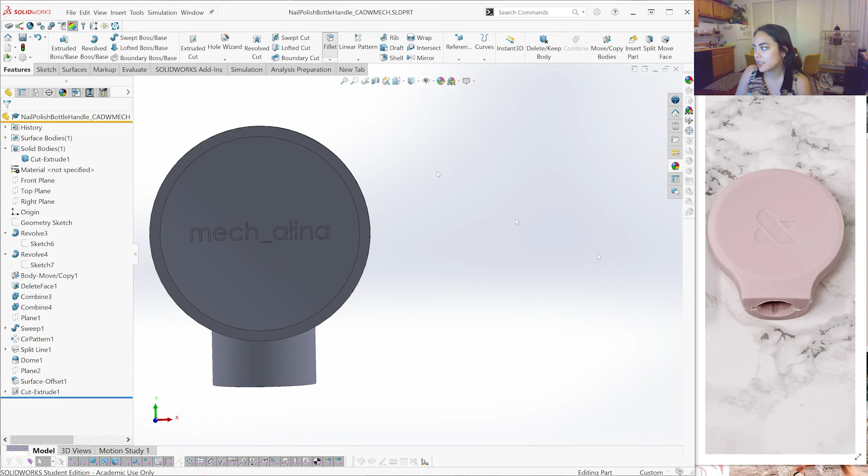Great, finally the time we've been waiting for: super fillet time. Let's add in our fillets and start connecting some of the parts that we have here.

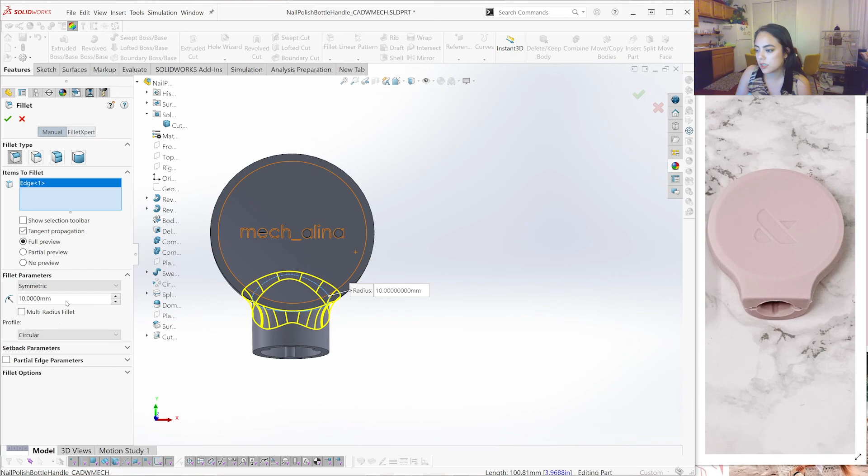So the first one I'm gonna fillet is this line here to be able to connect it. Let's look at that front view and see what we want to do with this. Let's bump that up a little more, let's see how far we can get it. Maybe even a little more, 25. That really blends it out, I think that looks cool. So let's click OK.

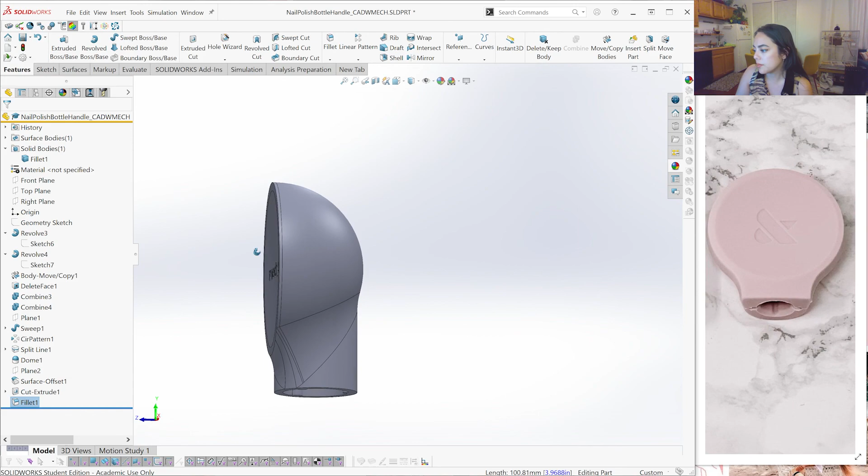Now we have those two parts all blended with just a symmetrical fillet there. You can see some differences from the original part, which actually has this flat that carries all the way down, but this is just my inaccurate, lazy weeknight version of it. Looking at it, I think that's really all I wanted out of this part.

Sorry for clapping right by my microphone just now.

I think this looks really great. I hope you learned something, or just watching to chill out, maybe pick up some fun techniques. That delete face one was kind of a fun one I did tonight. I hope you all have a great week and CAD away.